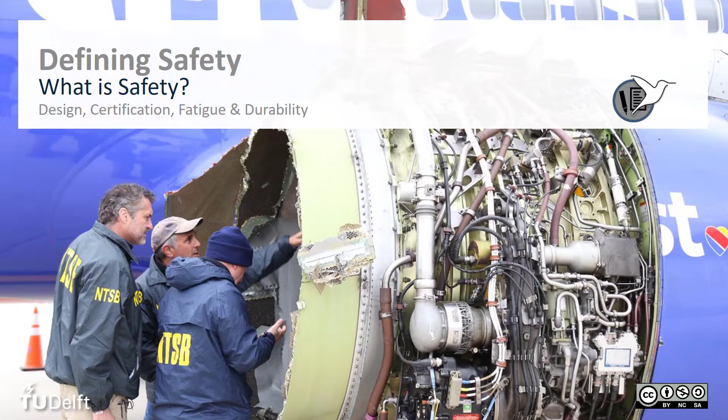What is safety? When is flying an aircraft considered safe? How do we define safety? And how do we quantify it? What is a proper measure of quantifying safety? Statistics could help, but you should understand that statistics don't solve it all.

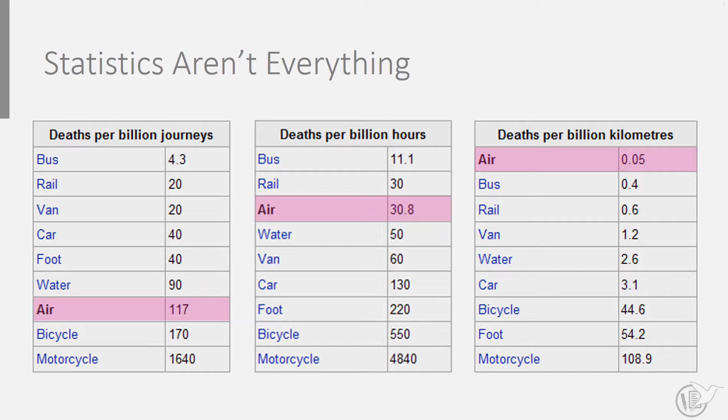Let's take the different definitions one can give for safety. Depending on whether we express safety as the number of fatalities per journey, per hour, per kilometer, the ranking changes. Aviation is often considered the most safe mode of transportation, which could be illustrated with defining safety in number of fatalities per kilometer. But change the definition and it seems no longer true. Evidently, this means that safety depends on how it's presented. It depends on the definition.

However, there's more to that. Take the psychological aspect contributing to how the public perceives safety in aviation. The fact that multiple car accidents occur in a week doesn't show up on the 8 o'clock news, while a single aircraft accident will be all over the news, often for many days, and people remember that for quite some time.

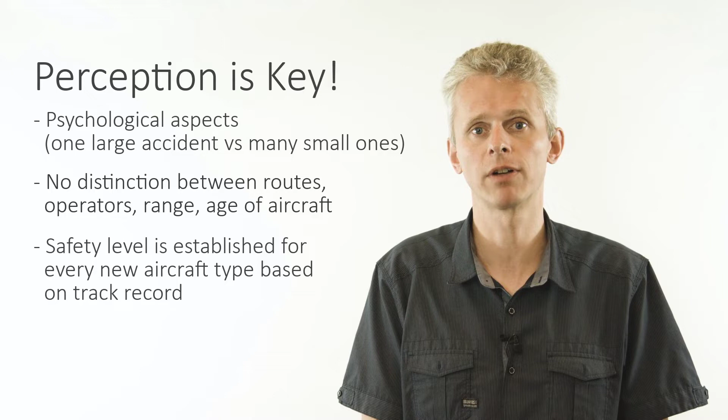Another aspect is that statistics make no distinction on the airline, the aircraft type and its age, or the route on which the aircraft is operated. It really makes a difference whether the accident occurs on a route from Amsterdam to Paris, or to Frankfurt, or to Heathrow, or whether it's a domestic flight in, say, Sudan or Afghanistan. Effectively, each aircraft type, including the new Boeing 787 and the Airbus A350, have to build their own track record of safety. You can't apply statistics to an aircraft just entering into service.

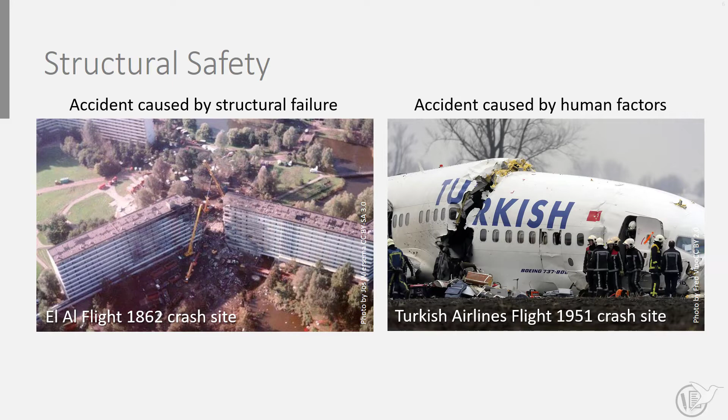But let's zoom in somewhat further, because not all aircraft accidents relate to structural failures. Structural safety relates to failure of a component or structure resulting in the accident. Here you have two examples of aircraft accidents near Amsterdam Schiphol. The left-hand side shows the accident site of the El Al accident in 1992, where a Boeing 747 crashed into an urban area. This accident was caused by fatigue failure of a component that initiated a sequence of failures leading to the accident. The more recent Turkish Airlines accident, however, did not relate to structural failure, but could be related to human factors. In general, about 70% of the accidents seem to relate to human factors rather than structural failure.

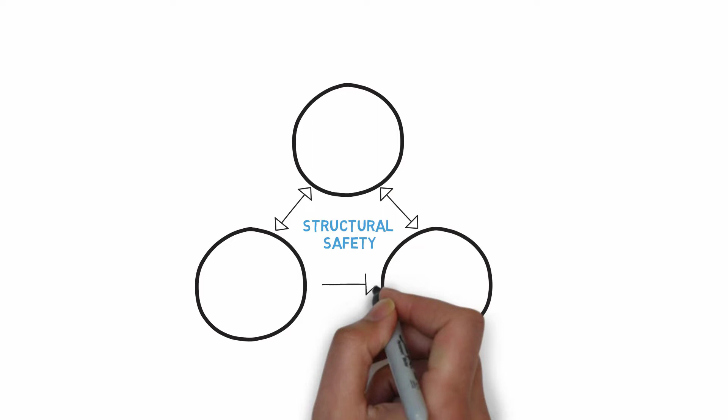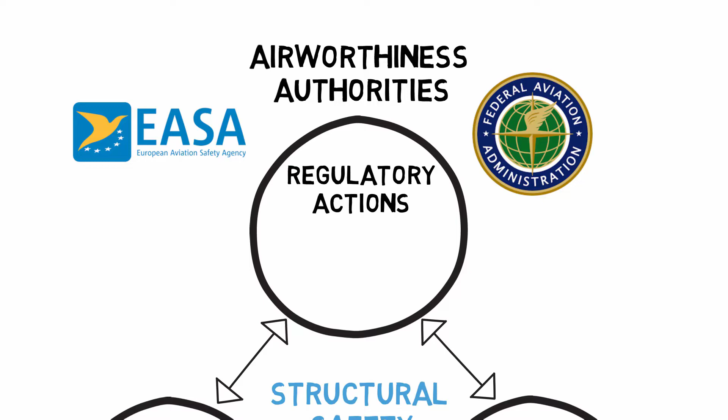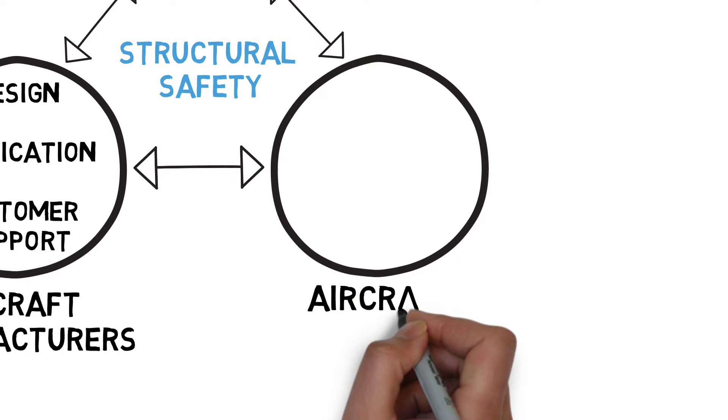Now, who is responsible for assuring structural safety? We can identify at least 3 different parties that are involved here. The first are the airworthiness authorities, like EASA in Europe or the FAA in the US. They regulate and prescribe what should be done in order to assure structural safety, and they monitor that. The other party involves aircraft manufacturers who develop, design and build aircraft, and in doing so demonstrate to the authorities that they comply with the regulations. Part of that compliance involves the prescription of how the aircraft should be operated and maintained. Hence, the third party comprises airlines and operators who comply with regulations and follow the requirements from the manufacturers on how to maintain the airframe.

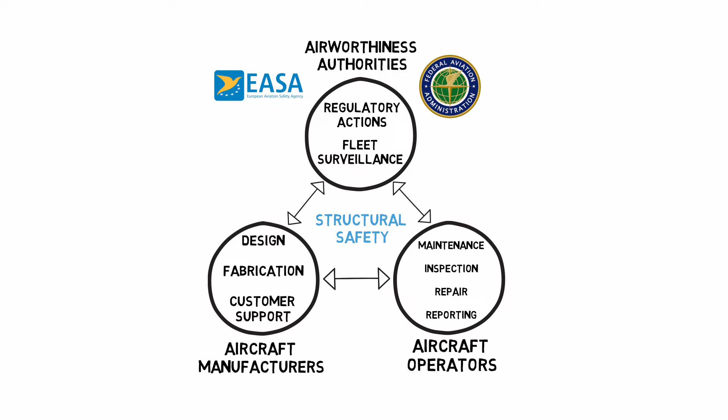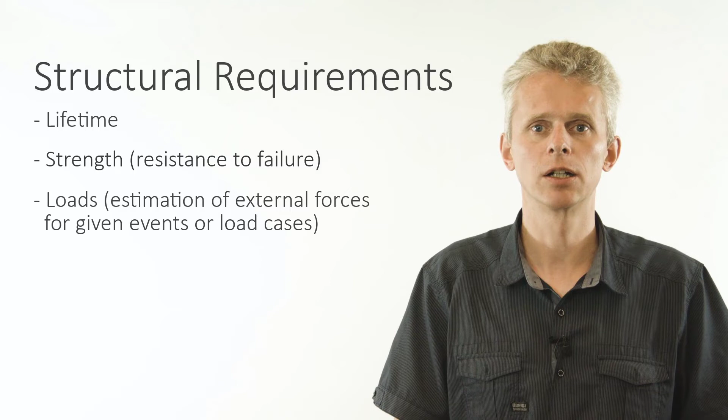The structural requirements involve various aspects, among which strength and loads. Strength represents the structural resistance to failure, which can be established fairly accurately through analysis and tests. Loads and load cases must be estimated. Although certain events are known, like takeoff, maneuvers and landings, the corresponding loads are not always the same. One may have a smooth landing one day or a rough landing the other day. Hence, they must be estimated based on how often certain events are expected to occur and on how severe the event will be.

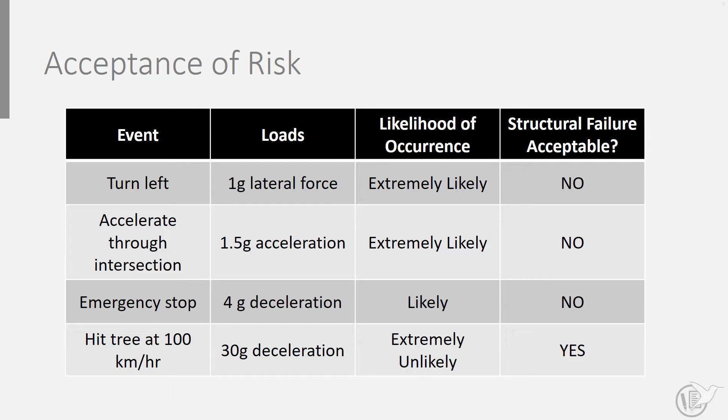Let's take the analogy with your car. For cars in traffic, many events can be expected to happen. One may turn left and right at various speeds with associated loads, or one may run into another car or into a tree. Each of these events has a certain likelihood of occurring, and for each event one has to determine up to what extent it is deemed acceptable. Running a car into a tree with a speed of 100 km an hour may have an extremely low likelihood of occurring, but if it occurs, survivability is low. Nonetheless, we all step into our cars and participate in traffic because we accept the risk.

This also applies to the acceptance of risks in aeronautics. We identify events and associated loads and forces. Because it's impossible to design aircraft that survive every event, we determine which events should be accounted for in design and estimate which event should form an acceptable risk.

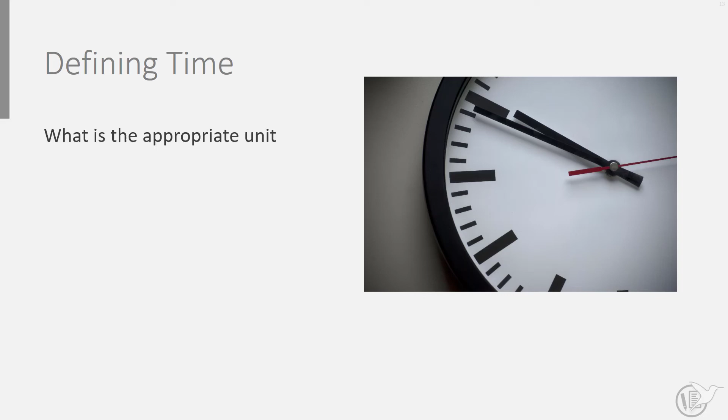The third aspect in structural requirements relates to lifetime. Components and structures should last a minimum required time. This time can be expressed in different units depending on the structure or element. In many cases, flights form the proper unit of lifetime, whereas in other cases, flight hours is deemed more appropriate. Each component has its own unit of lifetime.

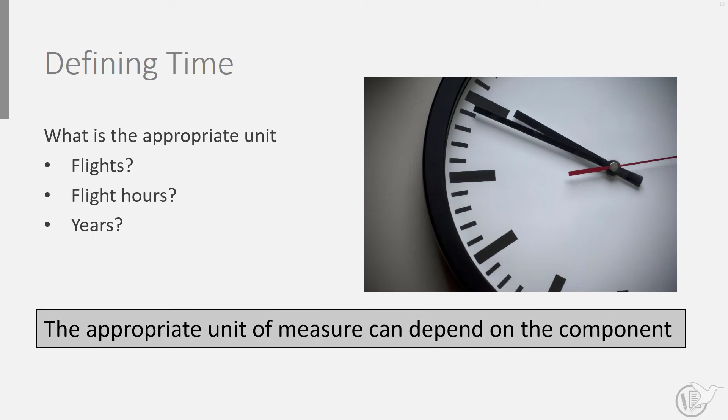Take for example the fuselage that is pressurized every flight. Such pressurization cycle requires flights as unit of lifetime. Engine components like turbine blades, however, require flight hours as unit of time, because these components rotate continuously throughout the entire operation of the aircraft. This means that for operating aircraft, both flights and flight hours are recorded to measure the lifetime of the entire airframe.